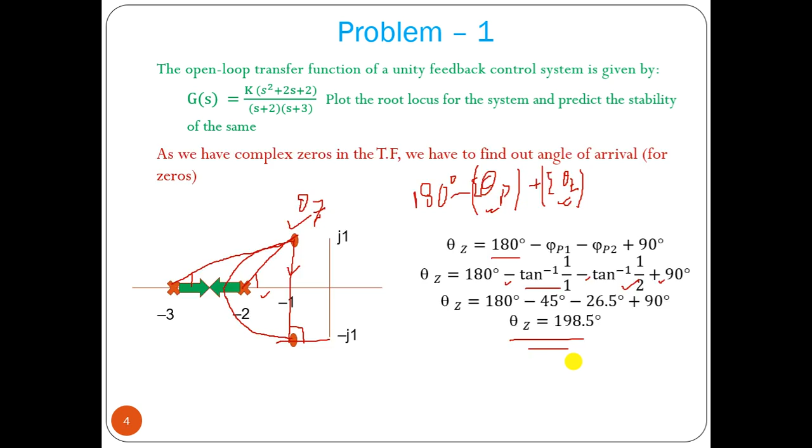So there is no asymptote, p minus z equal to 0, so there is no concept of centroid, and since there is no asymptote, it is not going to intersect with the imaginary axis, so this system will be absolutely stable. When these two poles are here at k equal to 0, it will be an over damped case. If it reaches this breakaway point, it becomes a critical damped system. As k increases, it goes into the complex plane, response should be under damped. So this is the prediction of the system.

Now let us solve another problem. This is the transfer function. Now from this we have to find out poles and zeros.

So we can see that poles are at minus 1 and plus minus 2. From this we can get minus 1, and s square minus 4 equal to 0. If we put that, then s square equal to 4, and from that we can find out s equal to plus minus root of 4, which is 2. And zero is at plus 1.

So here if you look how many asymptotes should be there, we have 3 poles, and 1 finite zero, so 3 finite poles minus 1 zero, we have 3 minus 1 equal 2, so we must have 2 asymptotes. From that we have to find out the centroid, and angle of asymptote. These are the 2 points we have to do.

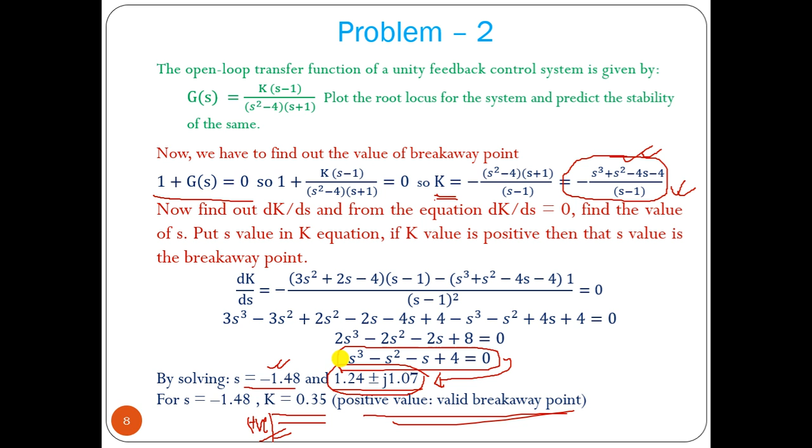So what we have here, that breakaway point we can see is at minus 1.48, and gain K is 0.35. And your centroid is around minus 1.

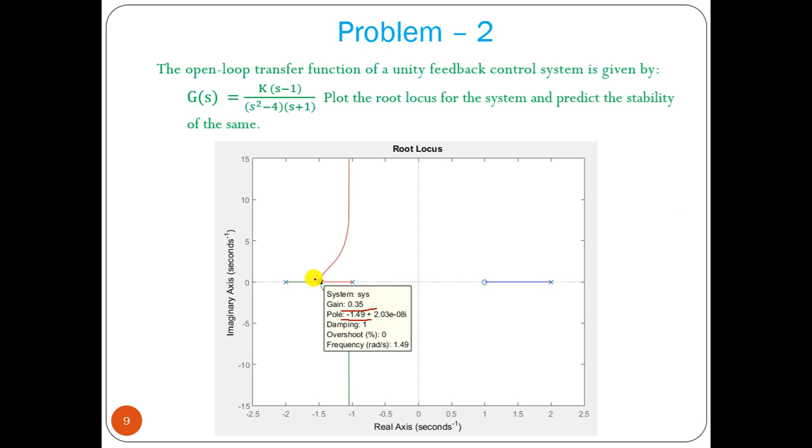So this pole merges with this zero, this pole comes here, breaks away, and it should go along the asymptote at 90 degrees, centroid at minus 1, to infinity zero. This pole comes here, breaks away, and it should go along the asymptote at 270 degrees, starting from minus 1 point, centroid. So this is the simple plot.

Now what is the stability of the system? As we can see, we have a pole, this root locus path not entering into the right half plane, but the system is still unstable. This system is always unstable because we have a pole at the right half plane of the S plane.

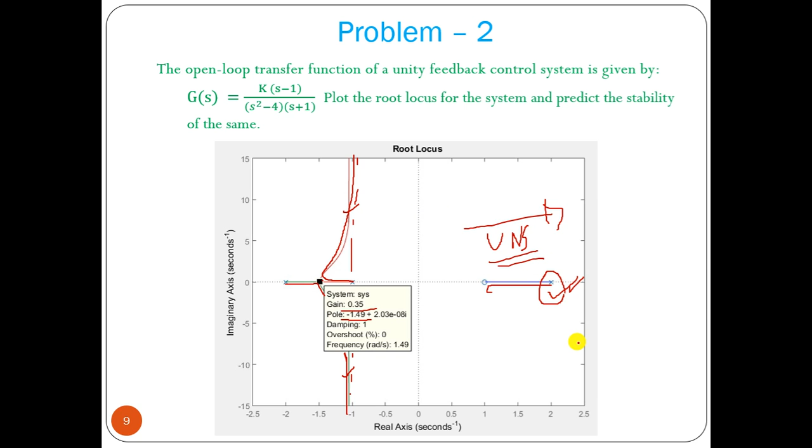So this is problem 2. Now let me discuss problem 3. What we have is this transfer function. So first point, we have to find out the location of pole and zero, then plot it on the S plane. So we have zero at S equal to 0, and pole at minus 1, s squared plus 1.

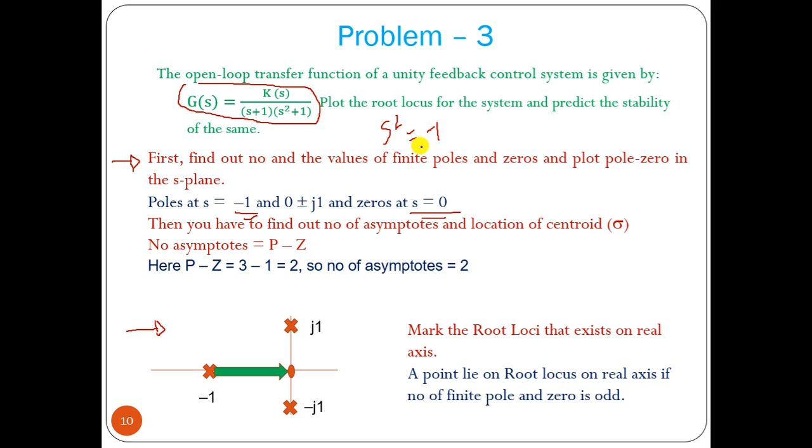That means s squared equal to minus 1. If you take the root of that, minus 1 root over, that is equal to j. So S equal to plus minus j1, that is the root. So what we have, if you plot that, we have a zero at S equal to 0, pole at S equal to minus 1, and we have complex poles plus j1, minus j1. Now we have to find the real axis segment.

So if we look here in this area, we don't have any pole and zero, so root locus path does not exist. If we check from this area to this, in this particular area, what we can see on the right hand side, we have 1 zero, so root locus path exists.

We have to look for the real pole and zero, don't have to consider this complex pole. Now if you look after this pole on the right hand side, what you can see, we have a pole and a zero, so no root locus path exists. So this pole merges with this zero.

Okay, what will happen to these two poles? These two poles should go along the asymptote, in the direction of asymptote, to merge with infinity zero. But now we have to find out how many asymptotes are there. Number of asymptotes should be 2, because we have 3 poles and 1 zero, 3 minus 1 is 2.

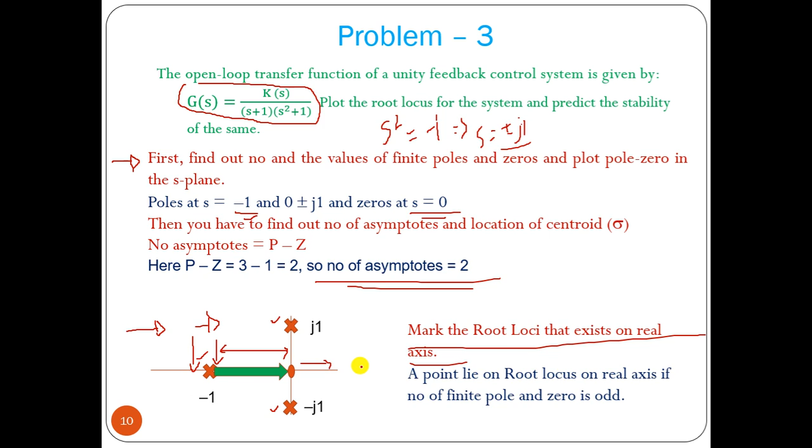So we can now find out the centroid and angle of asymptote. Centroid is the real part of the finite value of poles: minus 1 and plus minus j, so that will be 0, and 0 at s equal to 0. So it will be minus 0.5. At minus 0.5 we have this, and p equal to z, p minus z equal to 2, so we have q should be 0 and 1.

Let me just change this to degree. So now what we can observe here is that with q equal to 0 and q equal to 1, we will get a 90-degree angle and a 270-degree angle.

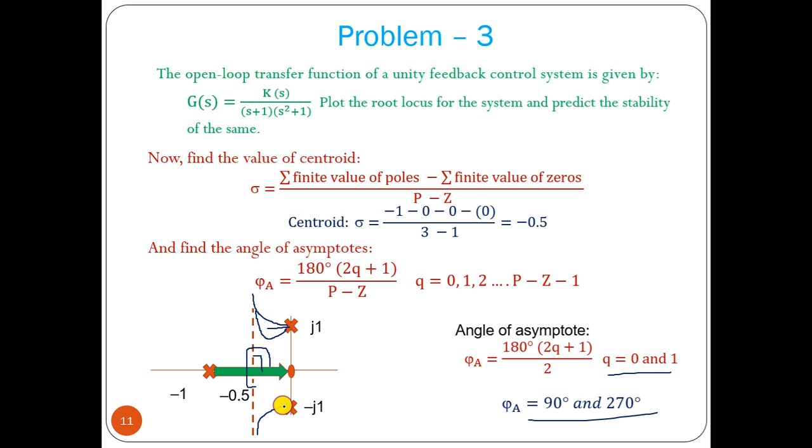So these two poles should go along this centroid, I mean along this asymptote line, to merge with infinity zero. Now we have to find out its angle of departure, at what angle it should depart. So we have to find out the angle of departure of this pole.

If you consider from this pole, that will be theta p equal to 180 degree minus, from this zero this angle is plus 90 degree, 0 plus 90 degree. From this pole, if you connect, the angle should be minus 90 degree. And from this, with respect to real axis, this angle is phi pole 1, so plus minus, it will cancel out. 180 degree minus this angle is nothing but tan inverse 1 by 1, so we got 135 degree.

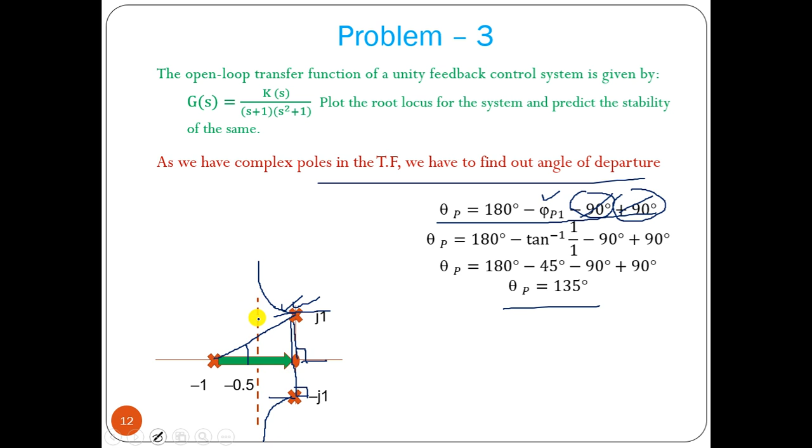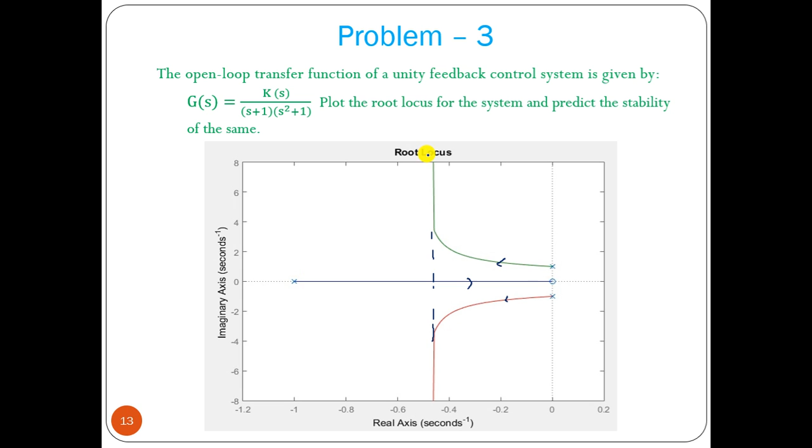So at 135 degree angle, it should depart, and then it should go to approach the infinity zero along the asymptote line. So this is the plot here. Your asymptote line is around 0.5, at 90 degree to 270 degree, and this pole merges with this zero, and these two poles go along this asymptote line to infinity zero, departing at 135 degree angle. This is problem 3.

Now let us solve another problem. This is one of the most interesting problems. We have this transfer function, so we have to find out number of poles: location s equal to 0, minus 2, and using the quadratic equation, we can find minus 1 plus minus j2. Here we have 4 poles and we don't have any finite zero, so number of asymptotes should be 4, so we need to find the centroid and angle of asymptote.

Now we can plot the pole locations: 0, minus 2, and we have two complex poles. If you look at the real axis segment for the root locus path, between 0 and infinity we don't have any pole, so root locus path does not exist there. Between this area we have only one pole, so root locus path exists here on the real axis, and after that, if you look, two poles are there, so there is no root locus path. So this is the real axis segment.

Now we have to find out how this pole breaks away, and it should go along the asymptote line to infinity zero. Now what you have to do is find out the centroid and angle of asymptote.

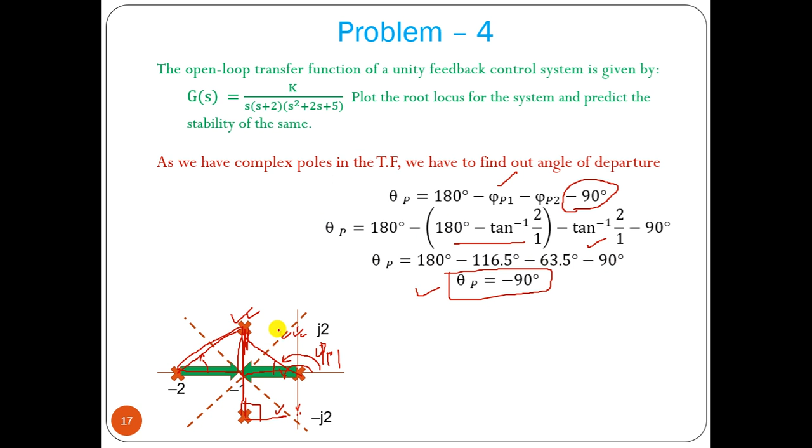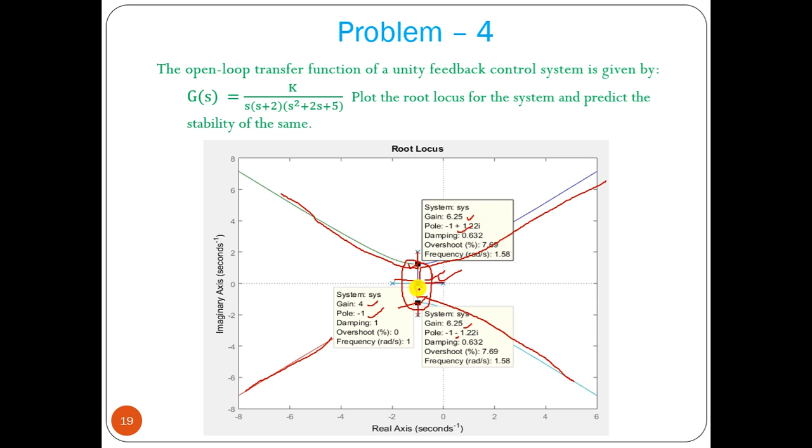We have these four asymptote lines that we have seen already, so these are the four asymptote lines, 1, 2, 3, 4, and the angle we already know. So this is one of the most interesting problems. We can see here we have three breakaway points. We have seen two breakaway points in previous problems, which you can find in the root locus problem lecture video, and here I showed that we have three breakaway points, one real, two complex. So this is another most important point.

Now let us solve another problem, problem number 5. Here also we have the same type of transfer function. We have a pole at 0, minus 4, and we have complex poles minus 2 plus minus j1. So we can plot that in S plane: 0, minus 4, minus 2 plus minus j1.

In the previous problem we had 3 breakaway points and it went like this way, but for this problem we have to solve it and find out where the breakaway point should be and how the poles are moving. Now we have to concentrate on, since we have only 4 finite poles, all 4 should approach to infinity along the asymptote.

So you have to find out the number of asymptotes, p minus z, that is equal to 4. We have to plot the real axis segment, that is between these two we have the real axis segment. On the right hand side we have one pole, from here we have two poles, so there is no root locus path. Now you have to find out the centroid: 0, minus 4, minus 2, minus 2, so it will be minus 2. So centroid at minus 2.

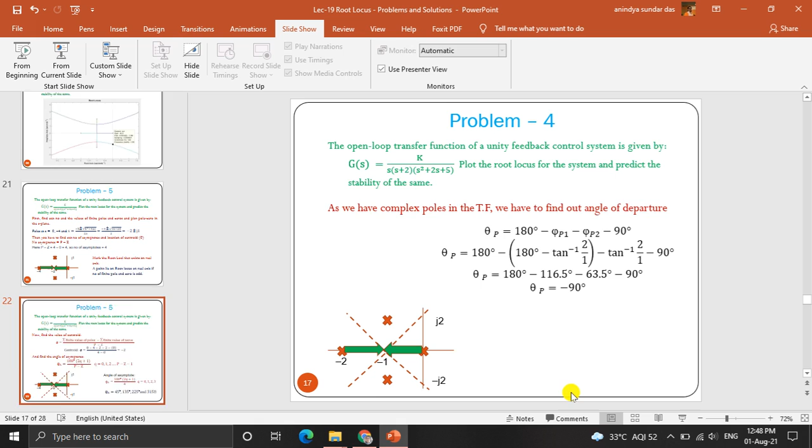And angle of asymptote we have to find out. That is, the formula is 180 degree into 2q plus 1 divided by p minus z, and when p minus z equal to 4, the range should be 0 to 3, since 4 minus 0 minus 1 is 3. So 0 to 3 should be the range. If we put q equal to 0, 1, 2, 3, we will get these four angles, which we can observe here.

So these four poles should approach to infinity along this asymptote line, but how they break away, and from which point, that we have to find out. Before that, we can find out the departure angle, because we have this complex pole, so what should be the departure angle of the pole? Let us find out that, then we can find the breakaway point.

So if you consider with respect to this pole, what you can see, this angle is minus 90 degree. Then we have to find out this angle. What is this angle? So this is 180 degree minus angle p1 minus angle p2 minus 90 degree, that we can write directly. Now this angle is nothing but 180 degree minus this angle, since this is a right angle triangle.

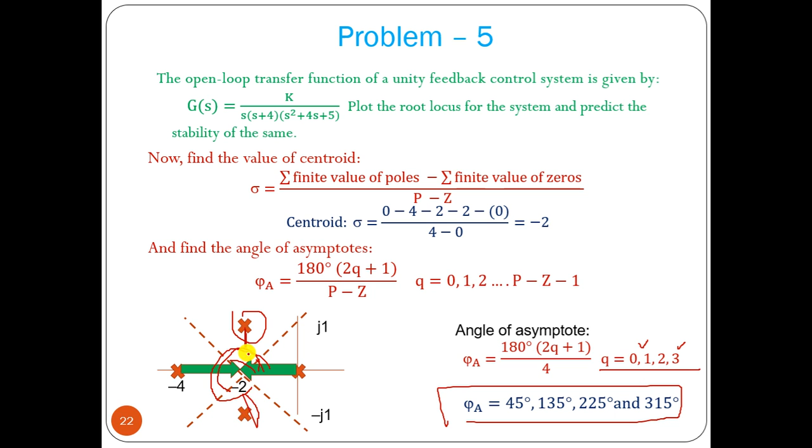So tan inverse 1 by 2, that is 180 degree minus tan inverse 1 by 2. From this right angle triangle we can find out the angle, that is tan inverse 1 by 2. Then you can calculate theta p equal to minus 90 degree. That means these two poles should depart at 90 degree angle, vertically down from here, vertically up from there.

Now you have to find out the breakaway point. So we have to write the characteristic equation 1 plus GH equal to 0, find k equal to the k equation, put dk/ds equal to 0, and then we got this equation, from which we can find out the value of s.

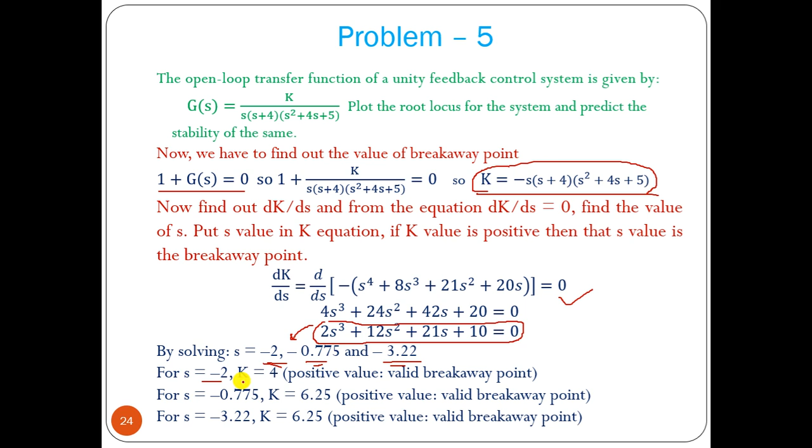Now we can see we have three values, all real numbers. We can put all these three values in the k equation to find the value of k. If s equal to minus 2, k equal to 4, a positive value, so it is a valid breakaway point. When s equal to minus 0.775, k equal to 6.25, this is also a valid breakaway point. When s equal to minus 3.22, k equal to 6.25, so it is also a valid breakaway point.

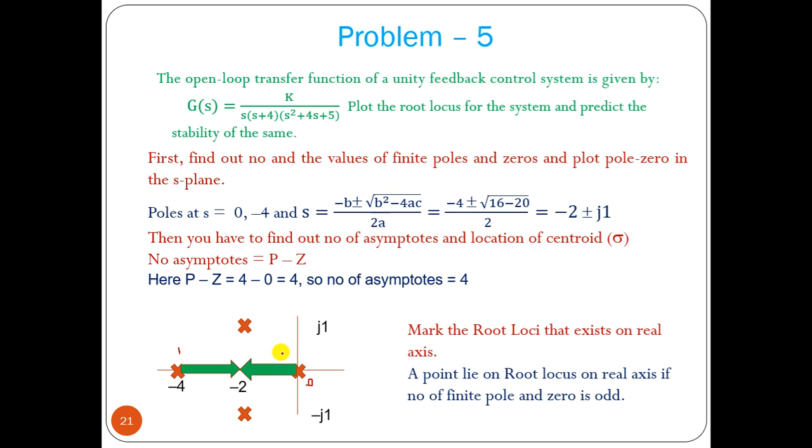Now we can see that on the real axis, the real axis segment is from 0 to minus 4, that is the range. And all these breakaway points lie within that range, 0 to minus 4. So these three are basically valid breakaway points.

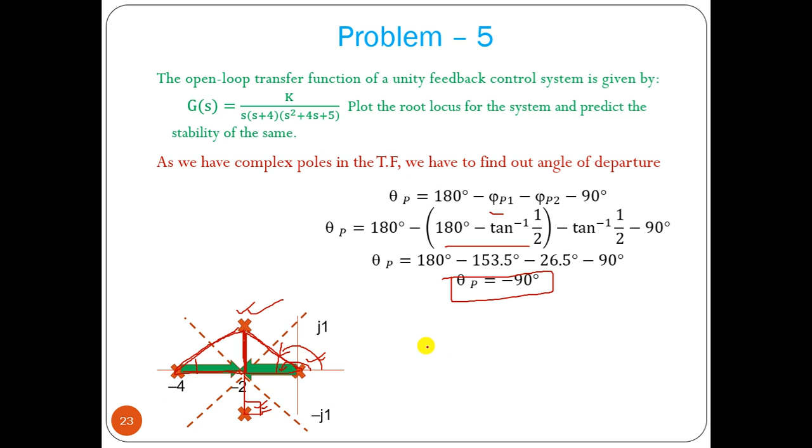Now we can see the waveform or the graph. So we have this four pole system. We have this point minus 0.775, gain is 6.25, that we already have seen. So this pole comes here, breaks away, and it should go along this asymptote line.

Now this complex pole comes here, breaks away, at point minus 2, gain is 4, that already we have seen, and comes to that point again, breaks away, and it should go along this asymptote line to infinity. This complex pole departs at minus 90 degree angle, comes here, reaches here, breaks away, then goes along this asymptote line to infinity. This pole comes here, breaks away, and it should go along this asymptote line to infinity at a particular angle, that angle of asymptote we already got.

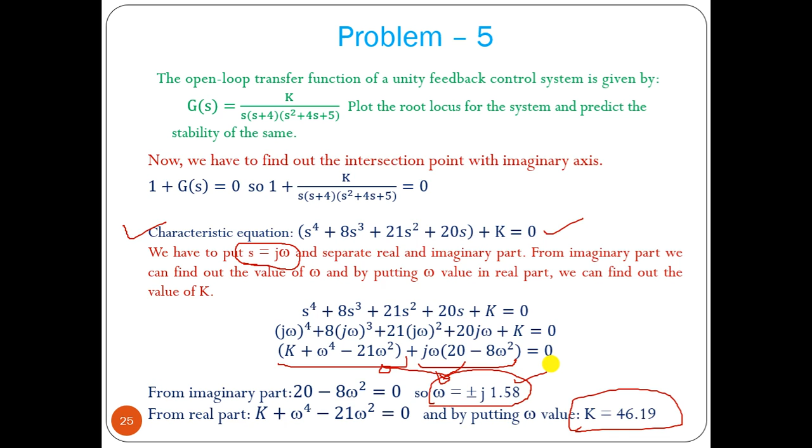So I have solved these five problems, five types of problems, where we can observe different characteristics. This system is not absolutely stable. It will be stable when k value is less than 46, at k equal to 46 or 47 it is marginally stable, and greater than that it should be unstable.

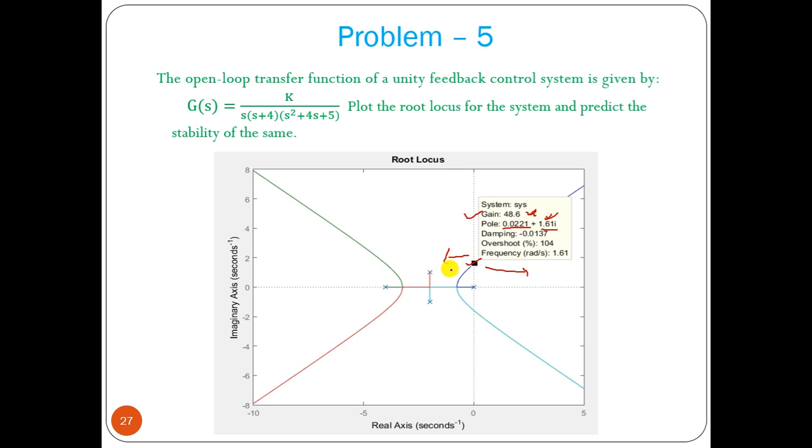So these are the most important five problems of different types that I have solved and uploaded in this particular lecture video. You can practice all these problems on your own, and then you can solve any type of problem on this root locus topic. So thank you so much.